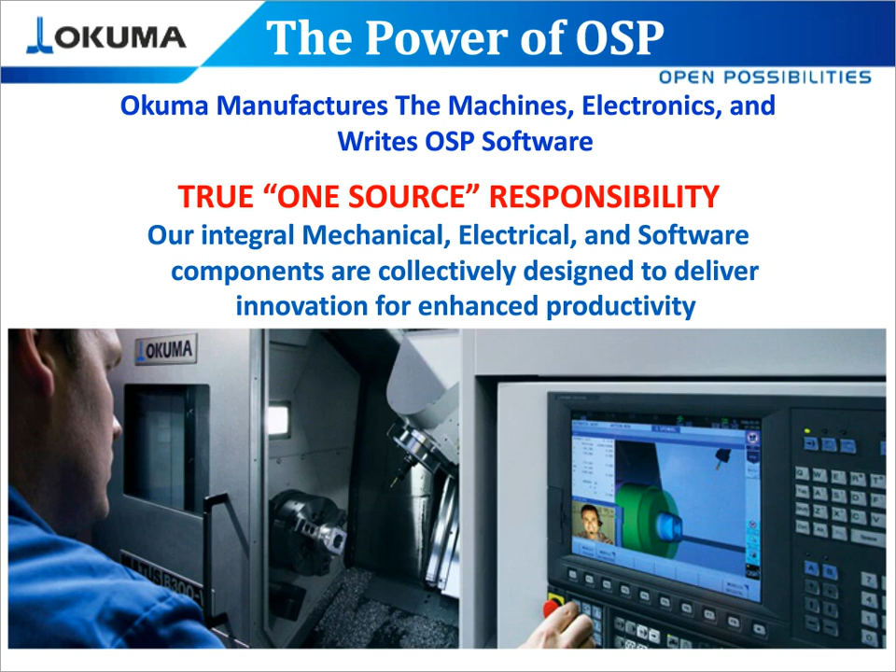We're not relying on any other builders or manufacturers to solve the problems that we see on a day-to-day basis. We're able to provide self-tuning drives, so we've got functions like our Servo Navi for tuning all of these different servos and drives that we have. We can provide that longevity of support like I talked about. We've shipped over 195,000 controls throughout the years, and like I said, we still provide support to earlier models.

The freedom to innovate. Because we are this one source, we're able to provide these unique services and platforms that are better catered to our customers. We've got less limitations for our software capabilities and improvement. So if I wanted to just go back and add another 1,000 parameters, I'd just go back to our software team that we keep in a cold, dark room back in the corner of the office. I'd tell them, hey, I want another 1,000 parameters. And they could give that to me in a matter of, probably half the time that it would take if I would have to use someone else's control.

If I bought someone else's control, I would be limited by that. So I have all these resources here that I can use. We're able to respond much more quickly to the needs of our customers, and we're able to grow and develop without these certain limitations that other controls would have.

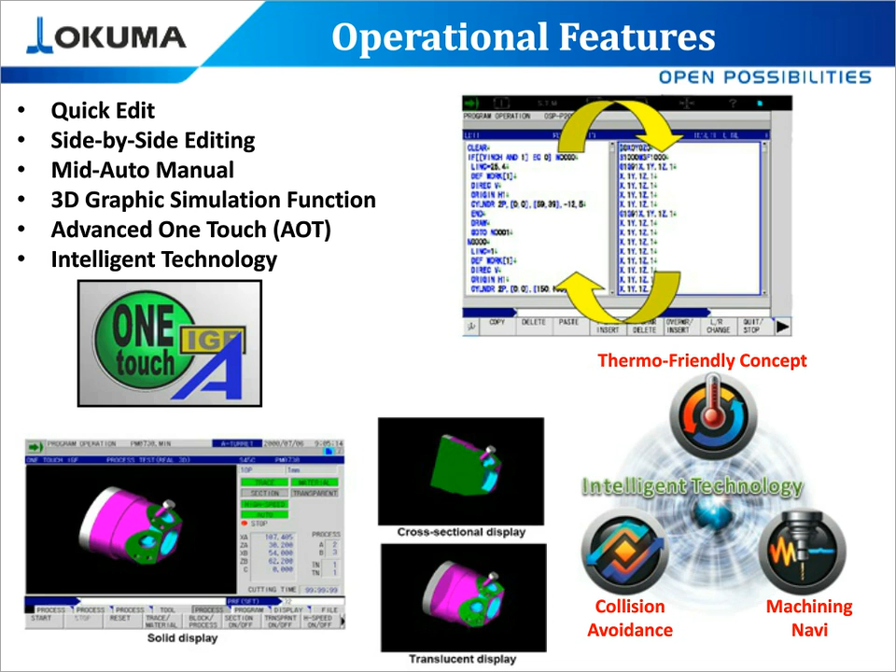So I did talk about that mid-auto manual function. I've got a short video here to describe what this actually is.

So I set this up on one of our lathes here. This is a P300L control, and I'll demonstrate the sequence restart in the mid-auto manual mode for this specific video. So you see we're just rough turning this part that you see on the screen there.

I'm going to manually interrupt the cycle, so I'm going to go into a feed hold state. Stop the tool. I select this mid-auto manual button, and what that allows me to do is jog away from the cut in any direction I want while I'm still in cycle. Okay, so stop the spindle.

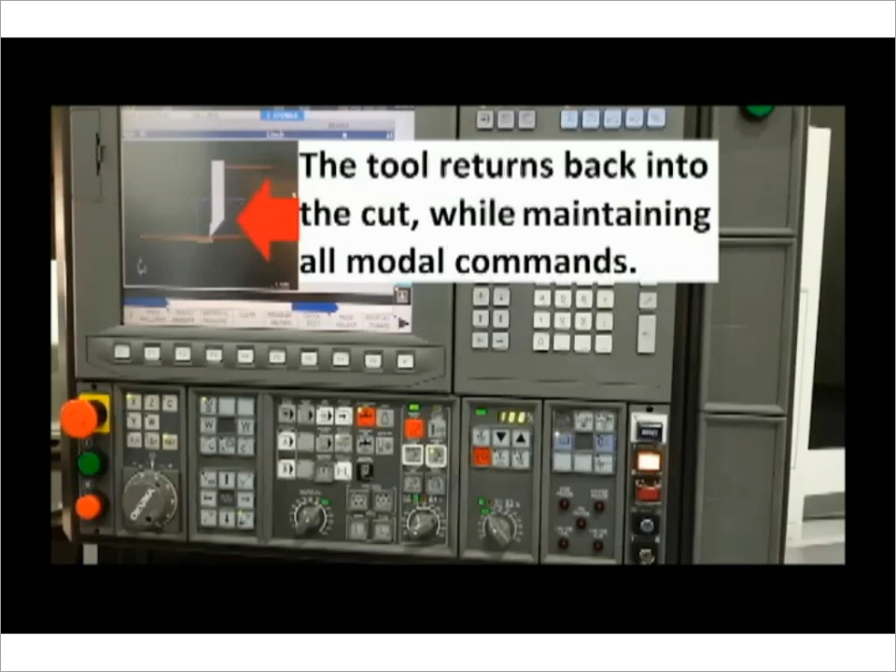I select the sequence restart button, and when I do that, after I've performed whatever task I needed to, that tool returns back into the cut, but it maintains all those modal commands. So after I've done that, literally the only thing I have to do is press cycle start, and it goes right back into my process.

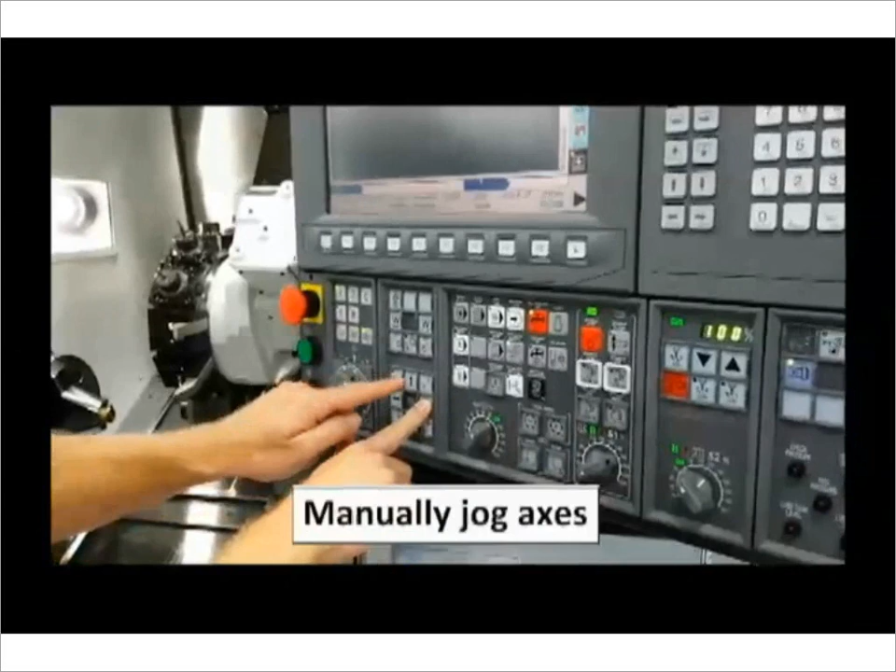So if I have to check an insert, maybe I'm drilling into a hole and I just need to check if my insert's all right, I would go into that mid-auto manual mode, jog back out of that hole, check my insert, make sure it's good, and I can return right back into that cut or drilling that hole. So this is just showing you with the machine there as well, manually jogging the axes.

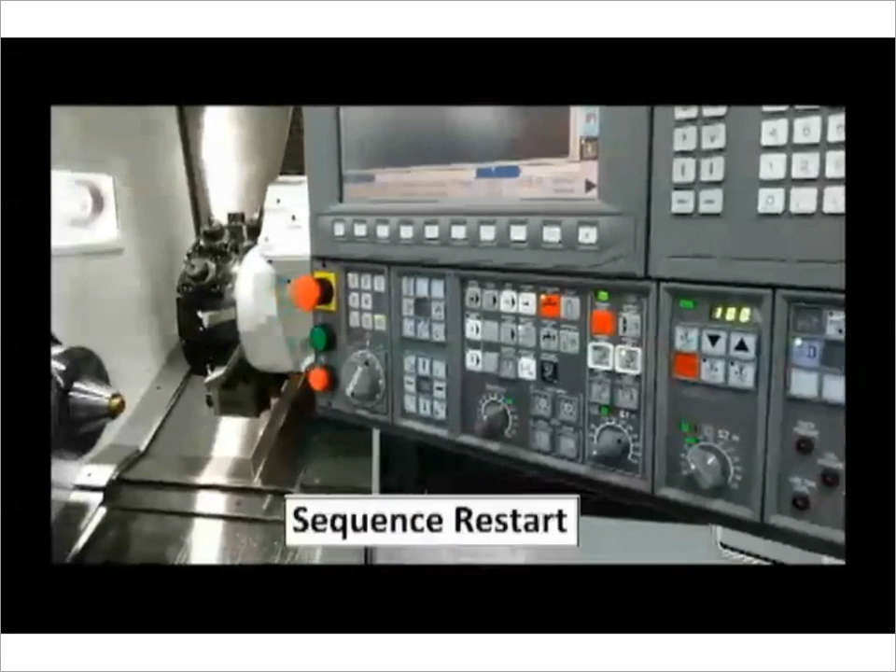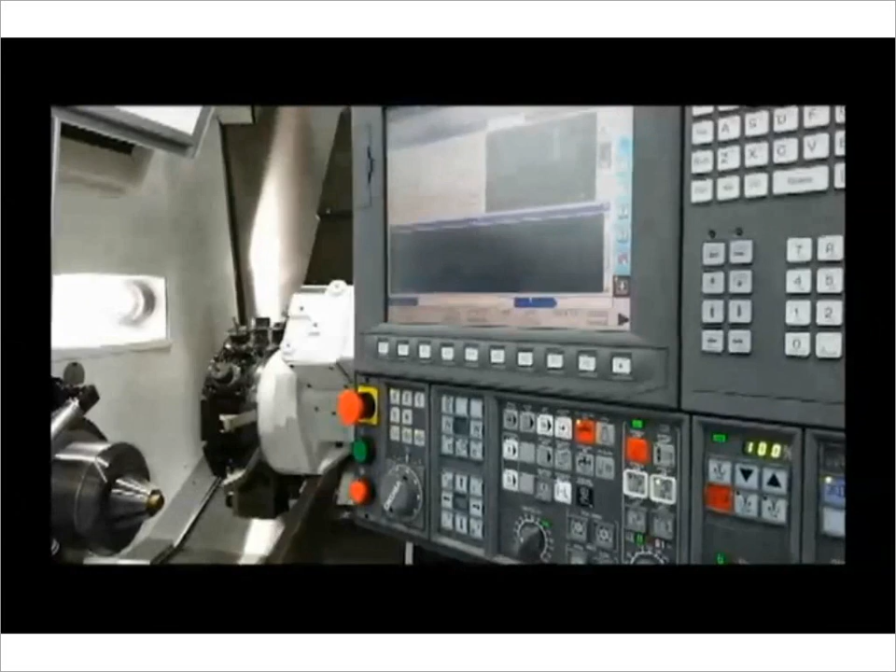And that's a standard feature of all of our controls, is that sequence restart and the mid-auto manual mode. They work in canned cycles as well. So this I'm showing you on a lathe, but if I had done this on a mill and I had drilled 50 holes, or I had to drill 50 holes, and I was on hole 49, and I wanted to check my insert or my tip.

So I go mid-auto manual mode, jog that thing out, and check it. Okay, it's good. But to return back into that cycle, I wouldn't want to wait 5 minutes to drill those 49 holes over again and air cut them. So with this function, I can go back into that 49th hole - or what if they were tapped? I wouldn't be able to do that. So I can go back into that 49th hole and continue right along with my cycle.

The next thing I'm going to talk to you about today is OSP Suite, and this is the newest generation of intelligent CNC technology that Okuma has provided. Basically what you're doing here is providing flexibility through our customization. I'm going to show you our maintenance and manuals functions. I'm going to show you all of these productivity enhancement tools that we've created in this software package.

I've got widgets for viewing vital machining information, but those are just a few of the things that make this OSP Suite software package really unique to our control.

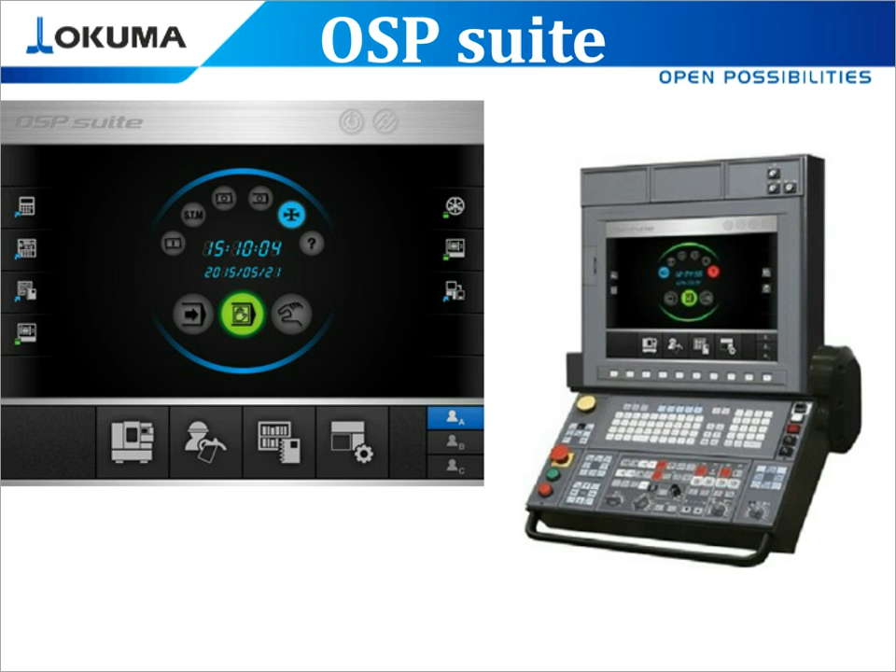So this is the OSP Suite home screen. This is what you're going to see if you have OSP Suite on your machine, and this is coming on our newer model machines. So when you walk up to the control, this is what you're going to see. This is the home screen, and if you direct your eyes towards the middle of the screen, that's going to be your machining status information.

So if you see the green lamp in the middle, that's letting me know I'm in MDI mode. You'll see if you're in auto, MDI, or manual mode, you see a clock and a date in the middle, and then you see your NC status lamps directly above that. So I've got my feed hold, alarm state, what have you, letting me know the status of my machine. So that's really what that middle section is for.

If you look off to the left and the right-hand sides there, you see those icons. There's 4 on the left and 3 on the right. Those are shortcuts that can take you to anything from manuals, calculators, any kind of remote desktop functions that we have. And I can put those on any page, any viewable page that I'll show you here in a second. But those are just quick little shortcuts that you can access just by touching the screen there.

At the bottom of the screen, you'll see that icon on the far left that looks like a machine. So that's going to take you to your run screens. I've got a maintenance function, which I'll show you here in a little bit. I've got manuals included with my OSP Suite package. And then I've got the ability to customize and personalize all of these different pages right here at the control.

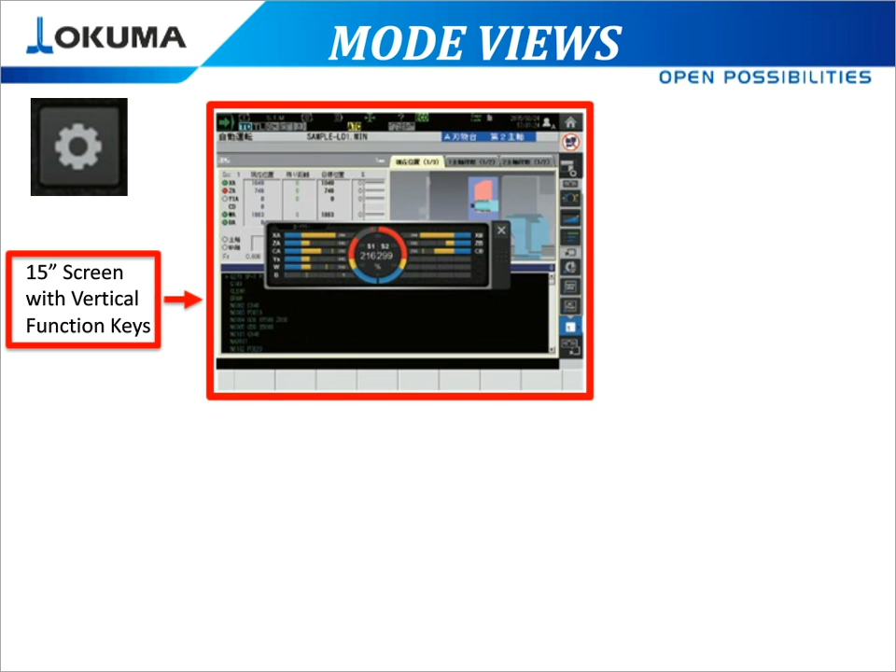With OSP Suite, we've got a couple different monitor sizes that we use for our machines. You've got a 15-inch screen and a 19-inch screen. The biggest difference you're going to see here in that red box is the 15-inch, and then my 19-inch screen modes are at the bottom there.

The biggest difference you're going to see here is the widgets. The widgets you'll see in the red box is that box in the middle right there, it's like a load monitor. With the 15-inch screen, since I don't have enough space to display all these, I have to put my widgets in the middle of the screen. These widgets again are just displaying vital machine information. I'll talk to you about what those widgets do here in a little bit.

I just wanted to show you that there's basically different modes that you can put our 19-inch screen in. Since we do have that extra landscape, we're able to really fill up the screen however you want. So I've got a full screen mode, A mode, B mode, just for the different widgets that are located on the screen. So I've got the ability to customize that if I like.

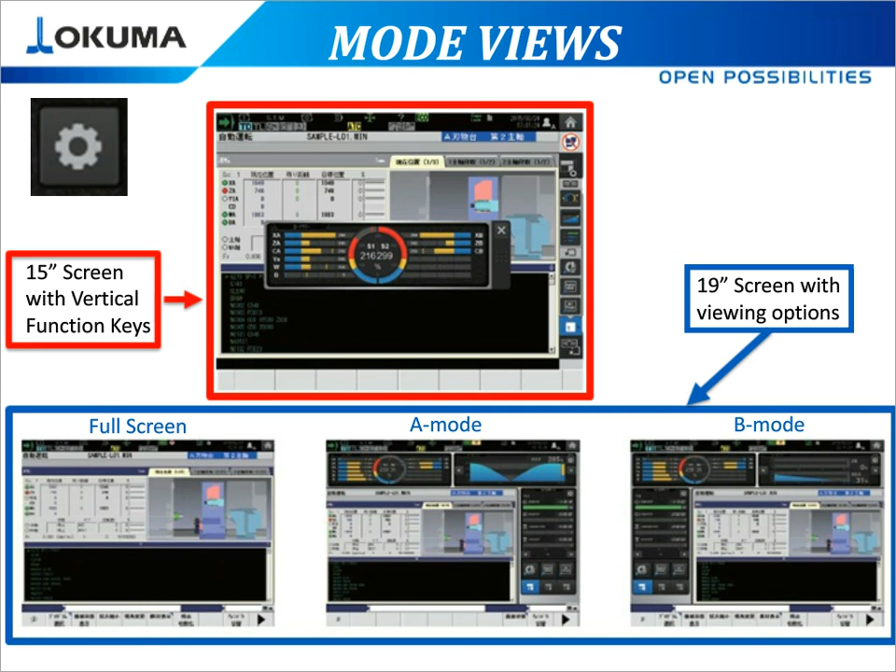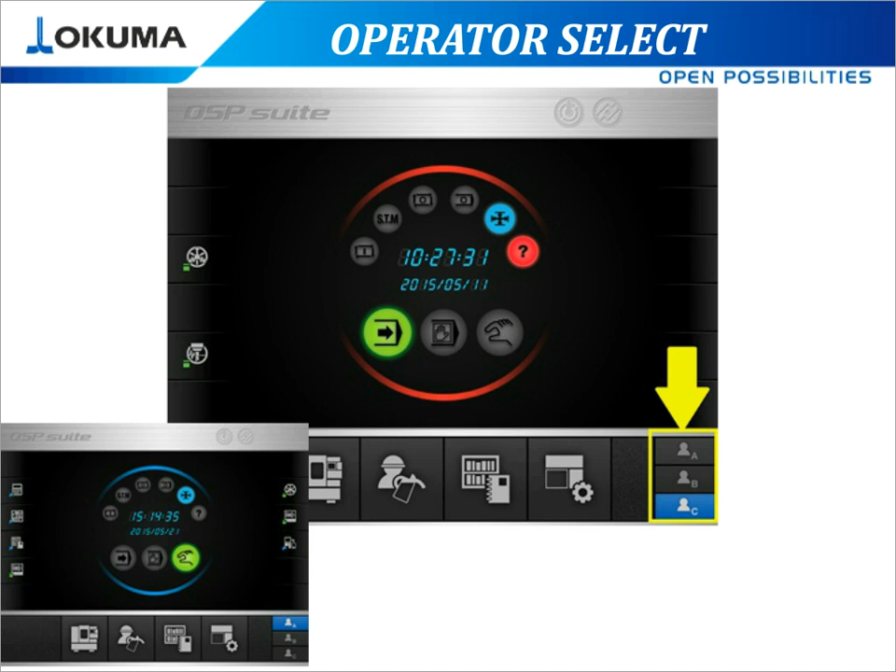Operator select: off to the bottom right, I've got the ability to select my different operators or users just by touching A, B, or C. All of these different operators can select all of their different run screens, their parameter pages, their tool data page. They can put all these different widgets and shortcuts and different things on all of these pages how they want to view it. So all of you guys are going to be different, you're going to want to see different things on all of these different pages that I'll show you. So we've given you the ability to customize and personalize all of these different pages, and it's very easy to change.

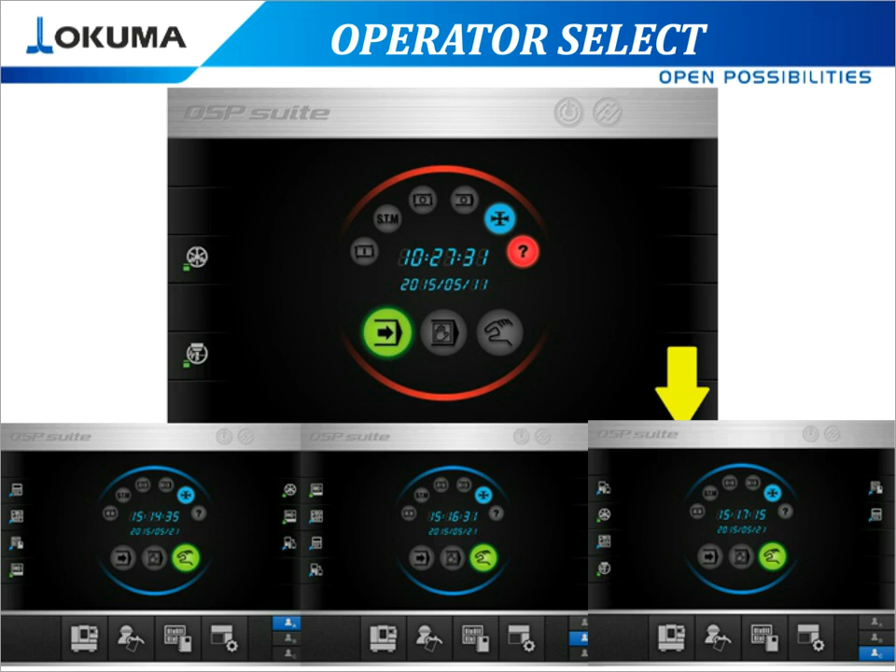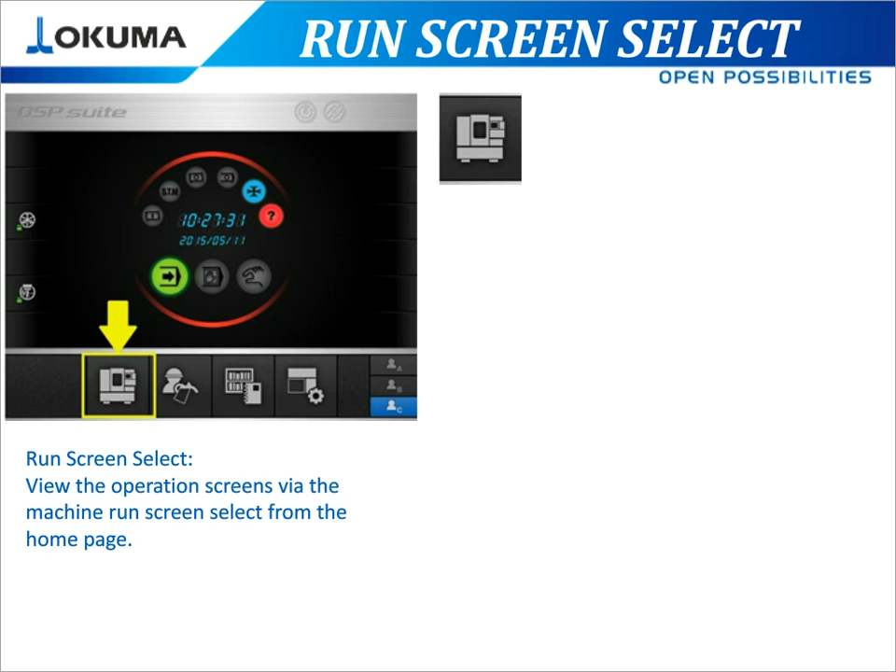So that machine icon takes you to the run screen. From the home screen, if you would hit that machine icon, that's just going to take you to your run screen or to your parameter pages, what have you.

With this setup, you see I've got two horizontal widgets at the top of my run screen and then a vertical one off to the side. And I said that you could customize and change all this and put whatever widgets you like on all of these different pages, but this is just the run screen that I'm showing you right here.

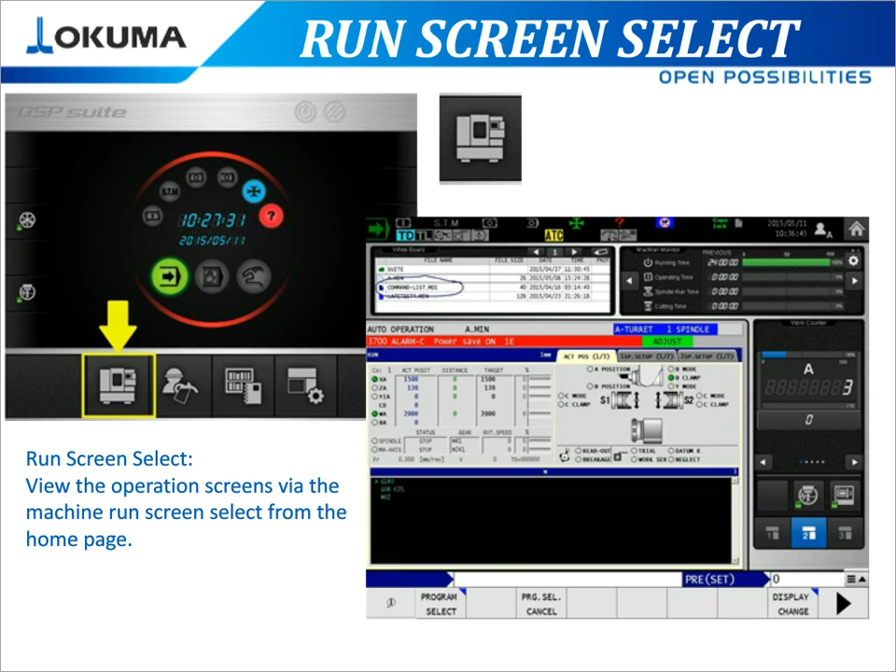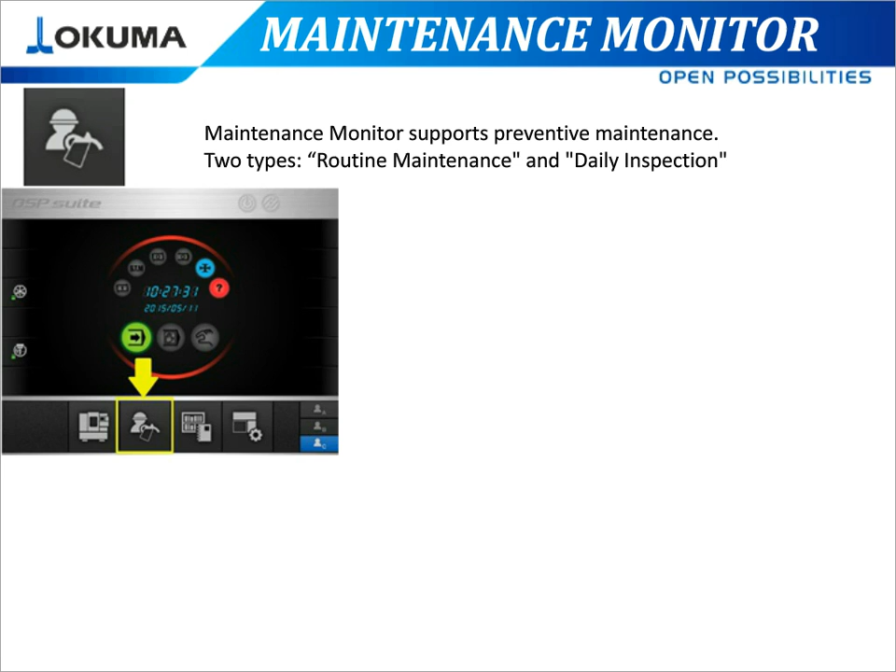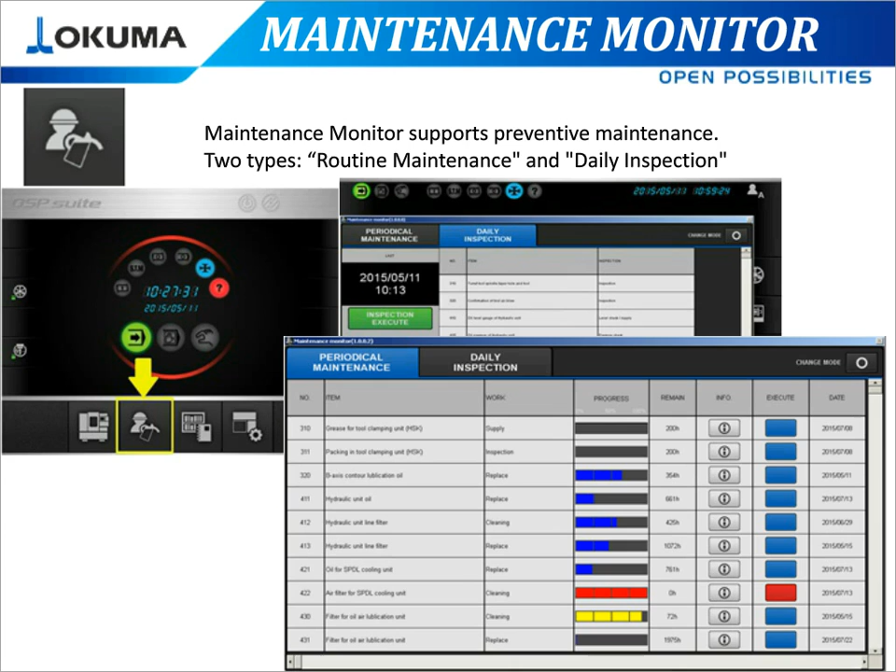And again, if you see in the top right corner, there's a change mode button with a little circle. That's going to let me edit or add new maintenance tasks to this list, and I can organize and view those how I deem necessary. So that's the maintenance monitor.

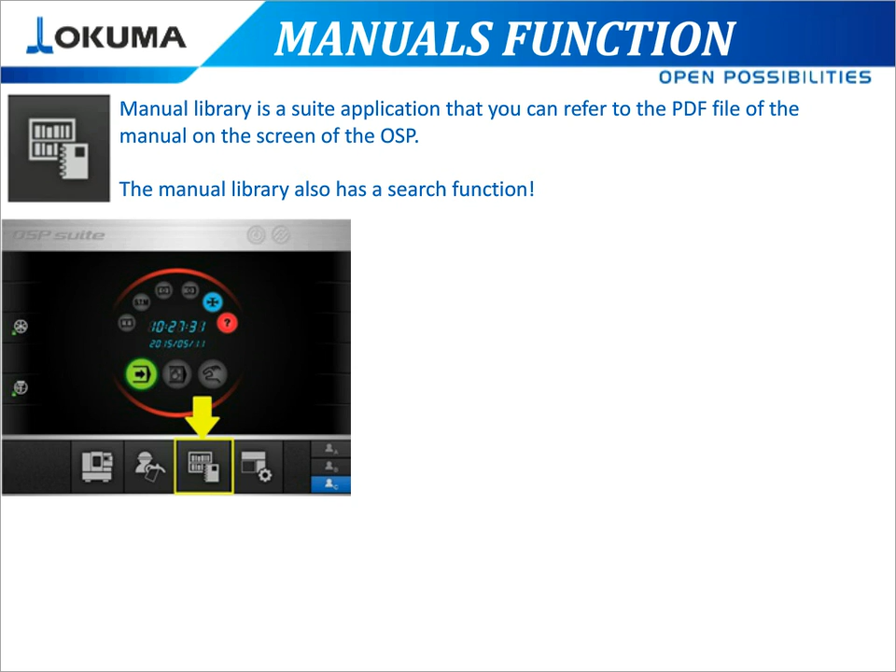I said there are manuals included with OSP Suite, and these manuals again are going to change based on the machine type and model that you have. But I have a list of manuals included that I can go in and pull up right here at the control. I said I didn't need to have a big heavy book out here at the control, or try to look things up online. I've got everything built into the control right here.

I've also got a search function included in this, because if I just had these manuals and had to go through the pages anyway, that's not saving me any time. Without this search function, I wouldn't really need this anyway. So that keyword search is great for these included manuals. And I can also add my own manuals and search for those as well. I've got a PDF viewer built into my control here as well. But that's the manuals function.

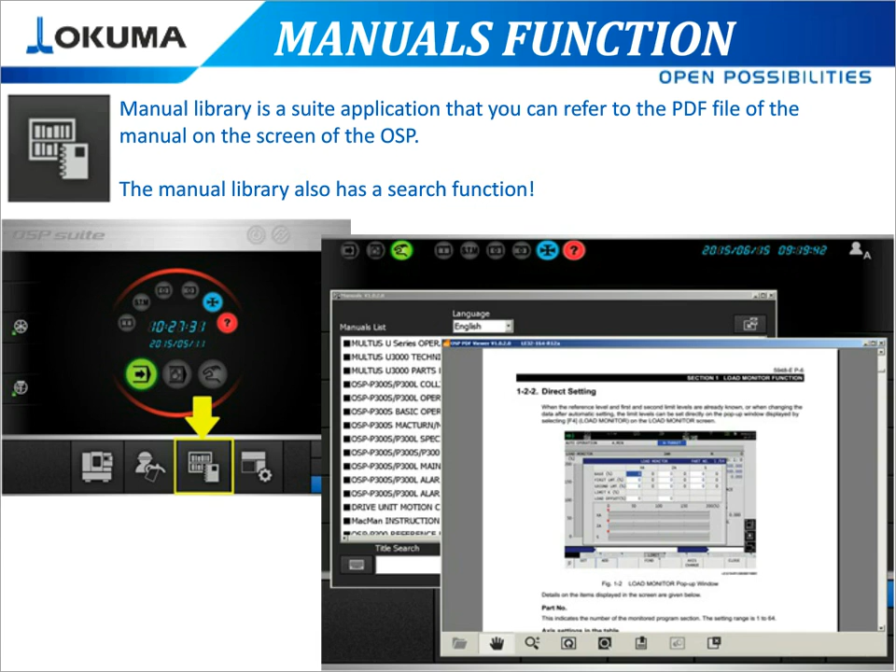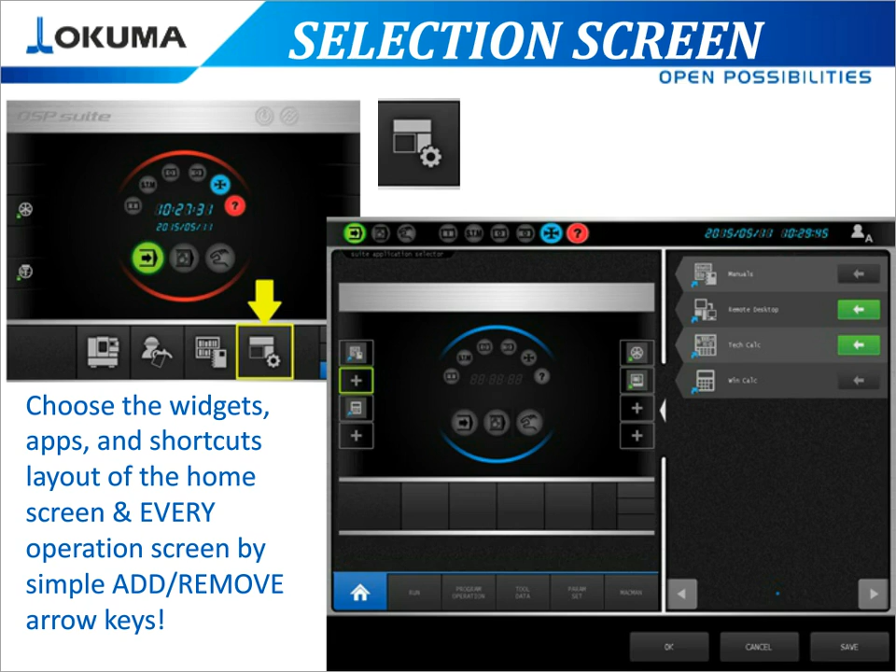These shortcuts that I talked about, I've got a few key ones: a Windows calculator built in, a technical calculator, servo navi, machining navi, and 5-axis auto tuning. And again, I can throw these on any of these different pages and view them however I want to.

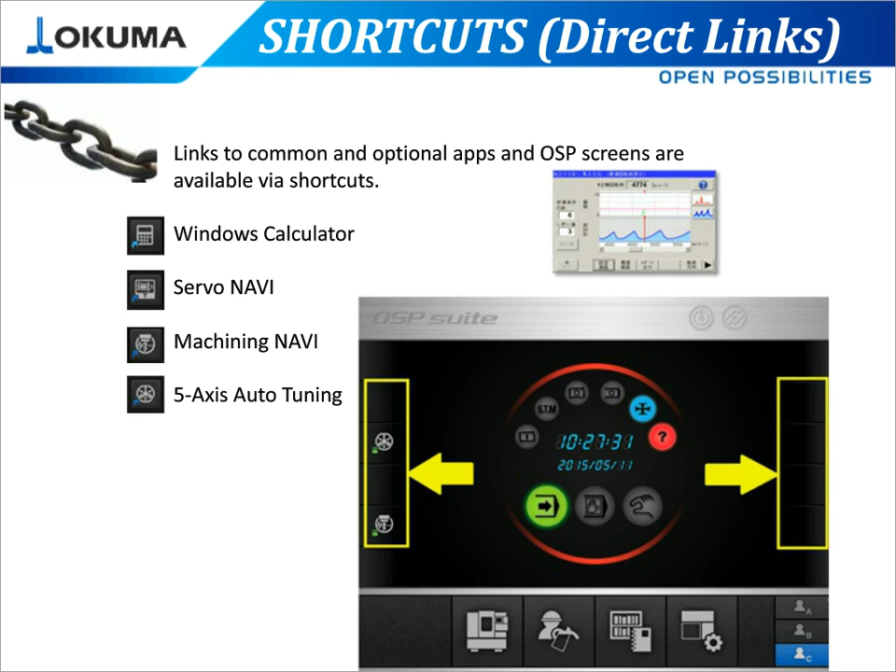Here's my technical calculator. I can calculate turning and cutting speeds, surface finish roughness, milling and end milling, common unit conversion, feed rates, drilling speeds - anything with this handy dandy calculator that I can throw on all of these different pages.

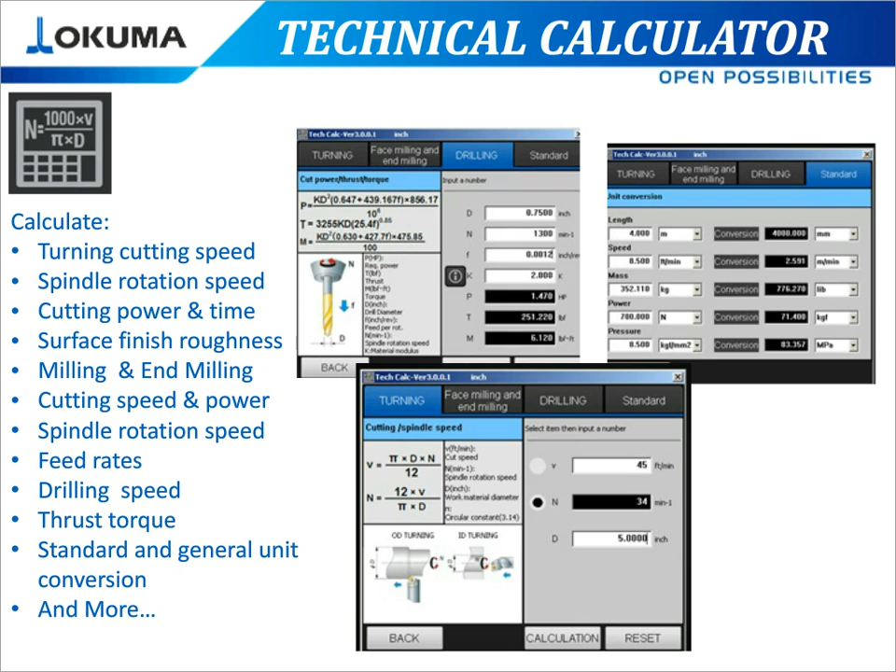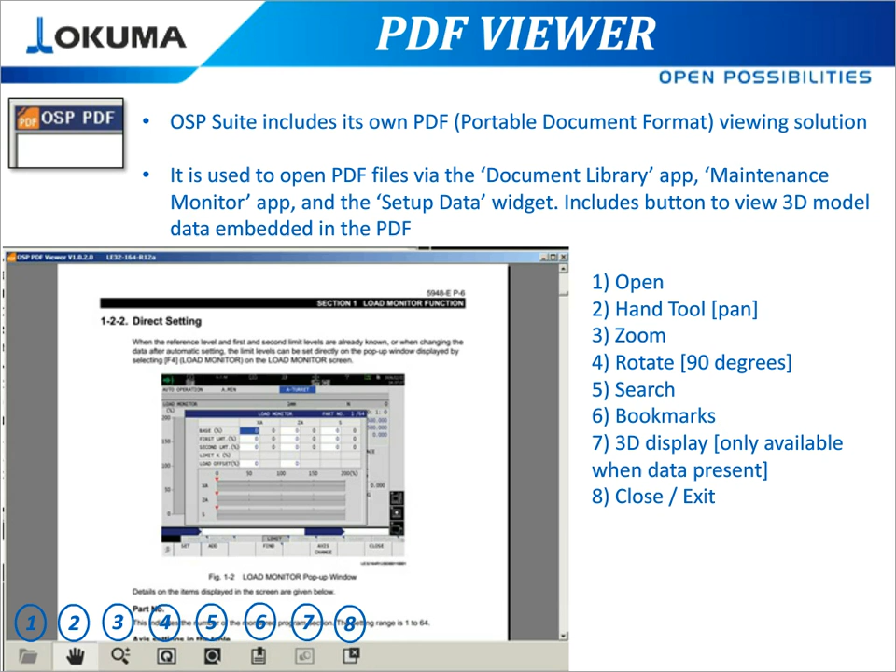A 3D model viewer, so I can view STL files right here from the control as well. I can zoom in, I can box zoom in on certain areas, I can view a translucent display of all these different files as I want.

It is a touch screen monitor, so I can drag and rotate this thing however I want to. So basically I'd throw all of these files into my control via USB or network, however you want to do that, and then I can have my setup guys view all of this from one of the widgets that I'll show you here in a little bit. So you could view this file, this STL file, right there from the control.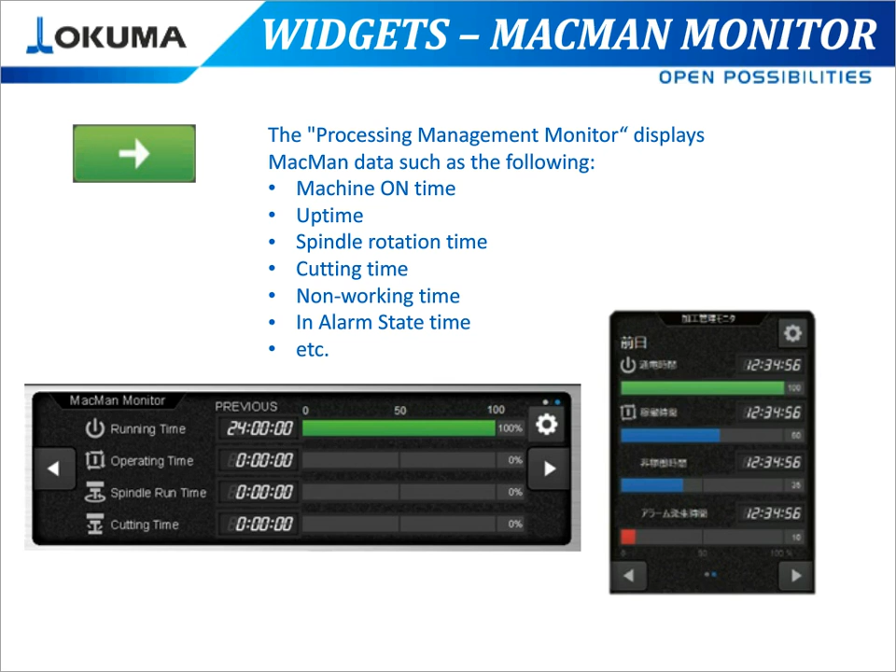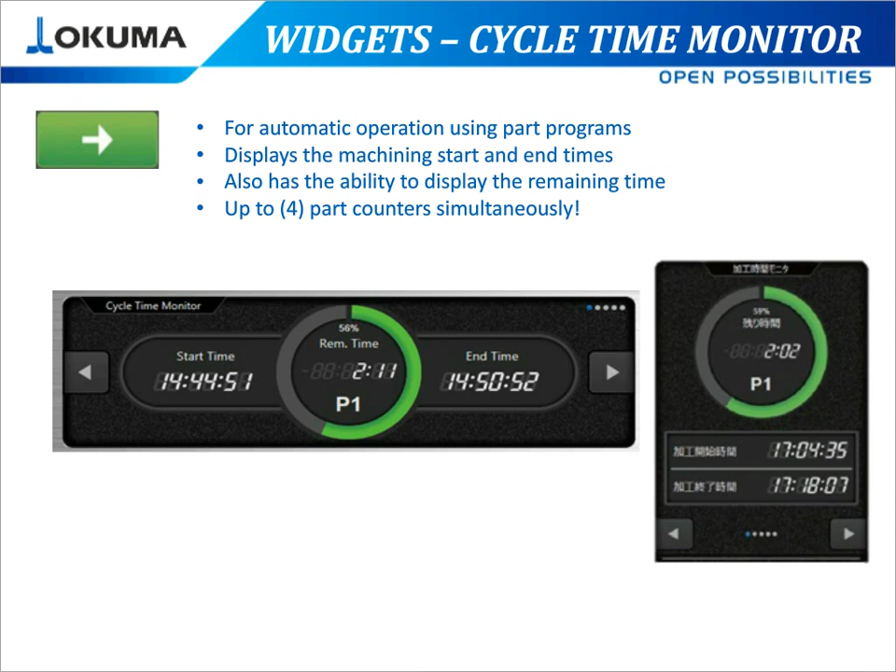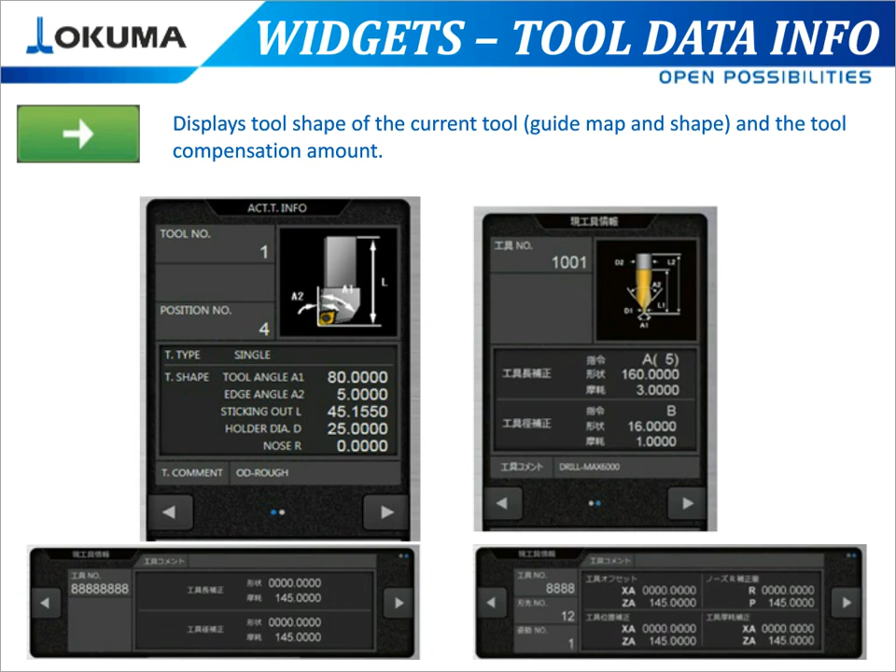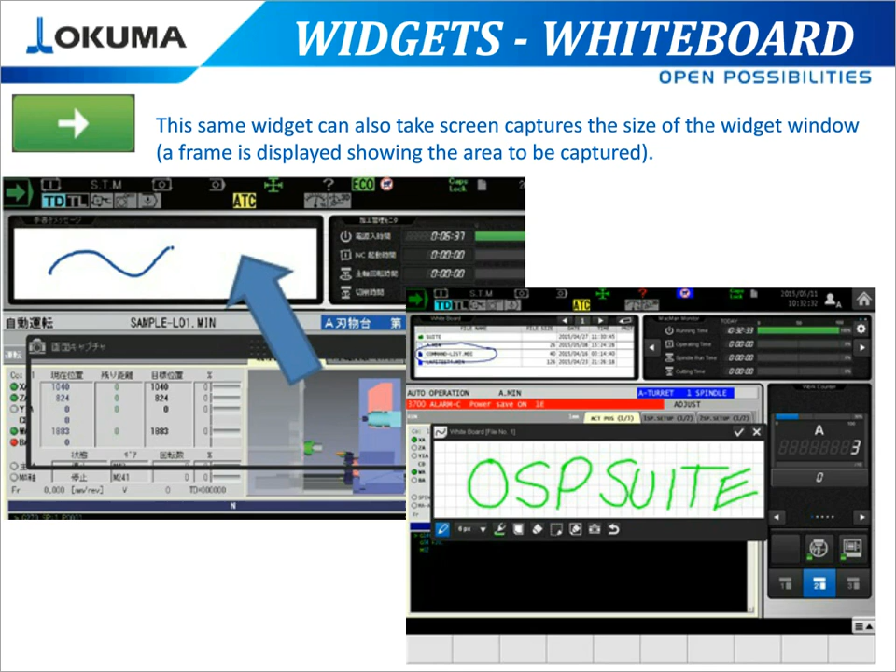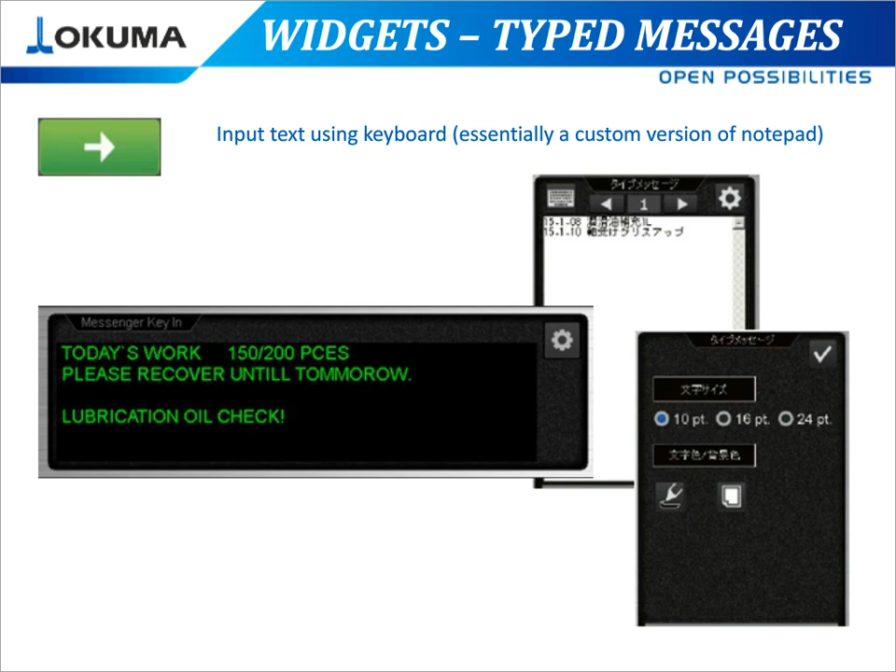I can also type messages as well. So if I didn't want to write the message by hand, I can use that keyboard to type a message, maybe to the next operator, letting him know what's going on with the machine. All of these messages, these notes, are stored in the MD1 directory. We have a Windows-based platform, just like your PC, so you can access these from the MD1 folder and export them as well.

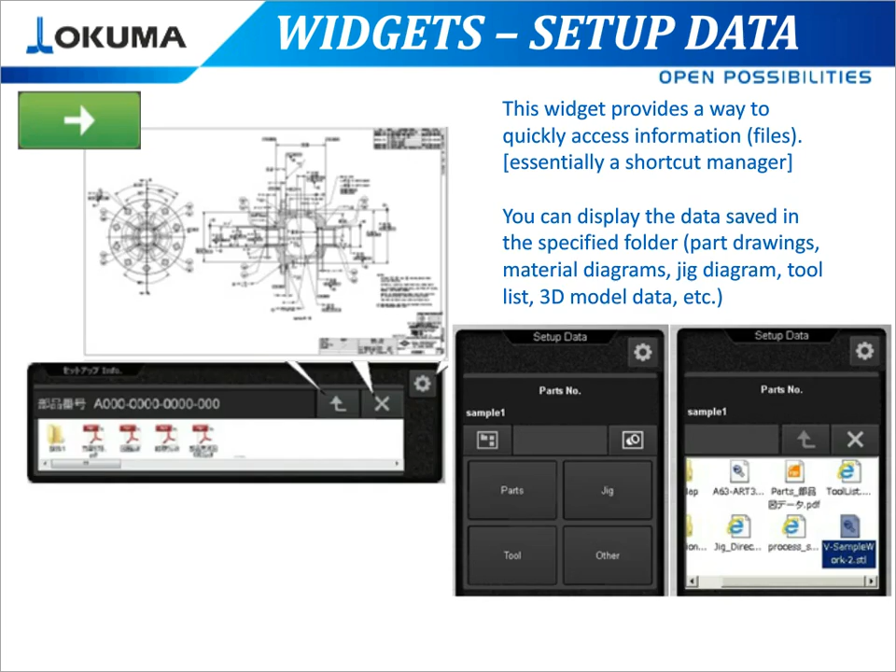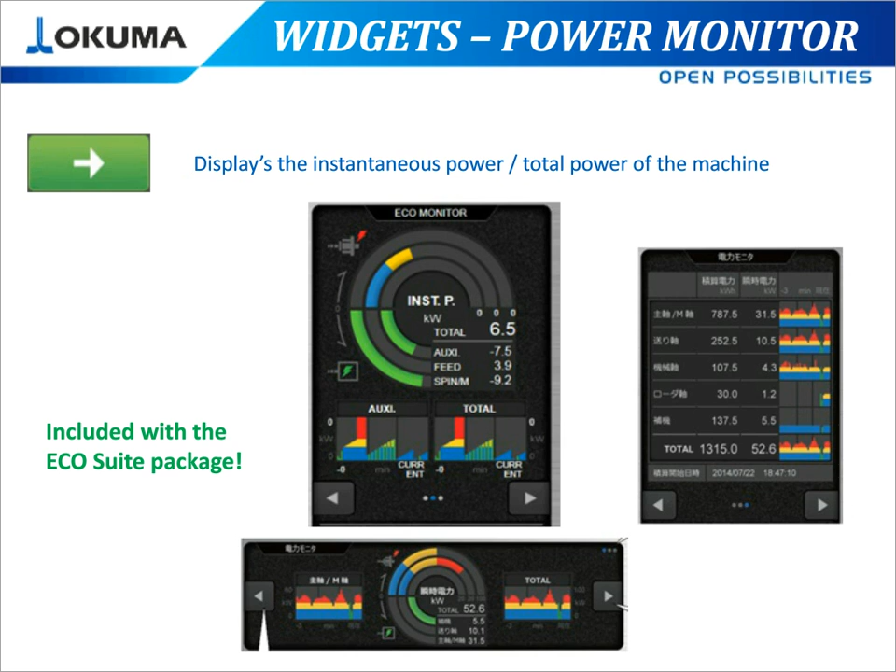That EcoSuite package is our energy saving technology. I just told you about that little widget for the instantaneous load - well, this EcoSuite package allows you to monitor that. I have the ability to turn on and off all of these non-essential pumps, conveyors, lights, and different equipment that I don't need when I'm not machining. After the machining has completed, I can set this up to automatically shut off all of this extra equipment connected to my machine or inside the machine, and it just shuts all that off automatically. After that happens, you'd see that load monitor decrease, and you can actually see the savings you get from this EcoSuite package.

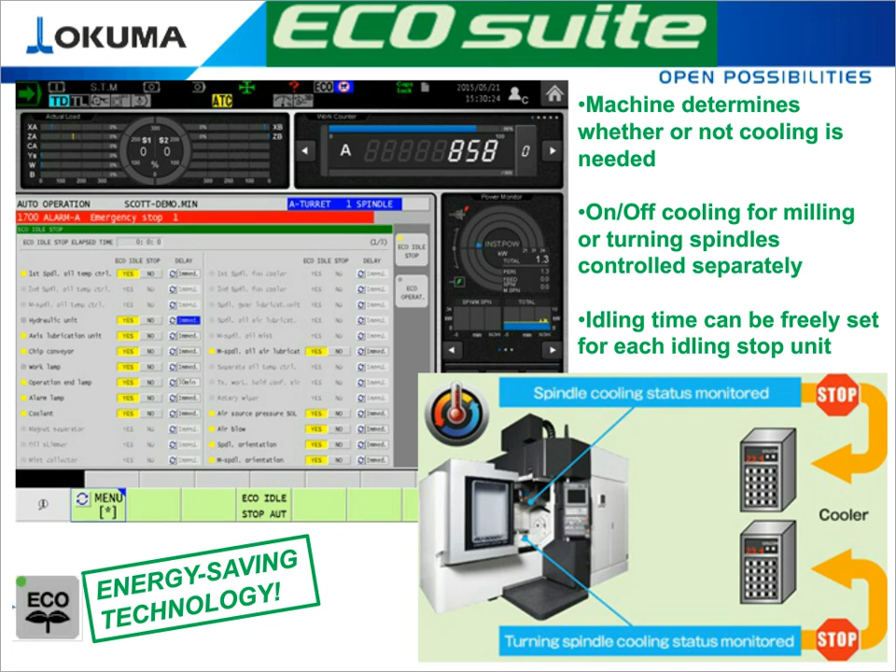To go along with our OSP Suite, if you haven't gone to our App Store or know about apps in general - behind our open architecture, it allows us to do things like create apps. Just like you have apps for your smartphone, you can have apps for your machine tool, for our OSP control. So when you get a second, go to myokuma.com. We've got about 30 plus - I don't even know now, it's always changing.

So many different apps that you can download from your computer and take it from USB right to the control, and you can have an app on your machine in less than 5 minutes. Or if you're connected to the internet already, you can just download it at the machine. But all of these different applications can provide really quick, productive ways for you to increase productivity in general in your machine tool.

So if you have any questions on apps or the App Store in general, please let us know and check out the website. But there's a lot of really useful apps. Like I could download an app called Machine Alert, so anytime my machine is in an alarm state, I would get a notification via text message or email letting me know about the alarm on the machine. That's just one example of some of the apps that we have on our App Store. I'm not going to go through all of them, but there's quite a few useful apps that we have customers downloading every single day. But that's our App Store.

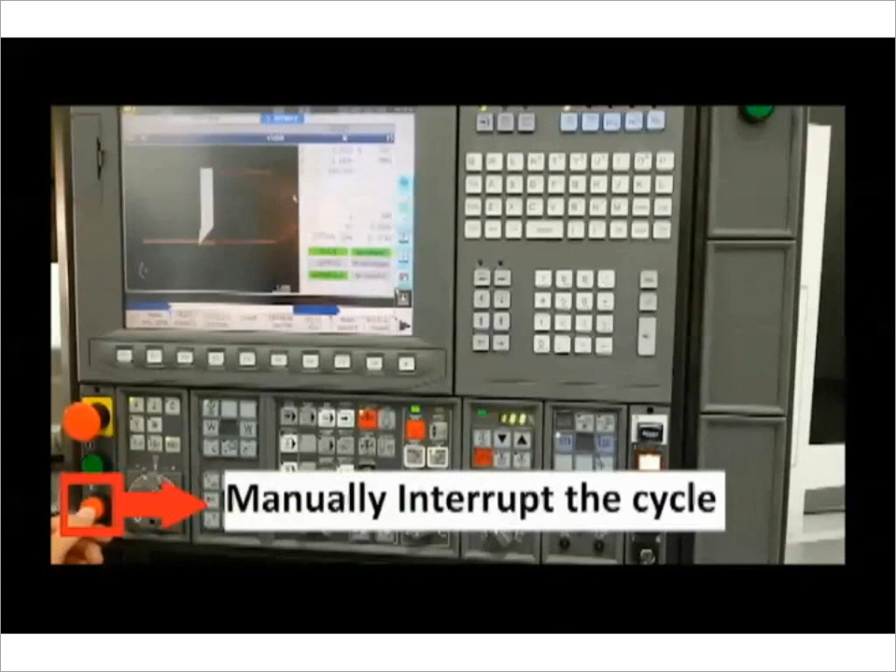So this specific video, I'm demonstrating the sequence restart function and also the mid-auto manual mode. These are standard features, standard buttons you'll see on our controls. Right now you see I'm just doing a rough turning process. Once I'm turning, I'm going to manually interrupt the cycle - maybe I need to check my insert or something. So I go into feed hold, and then I select this mid-auto manual button.

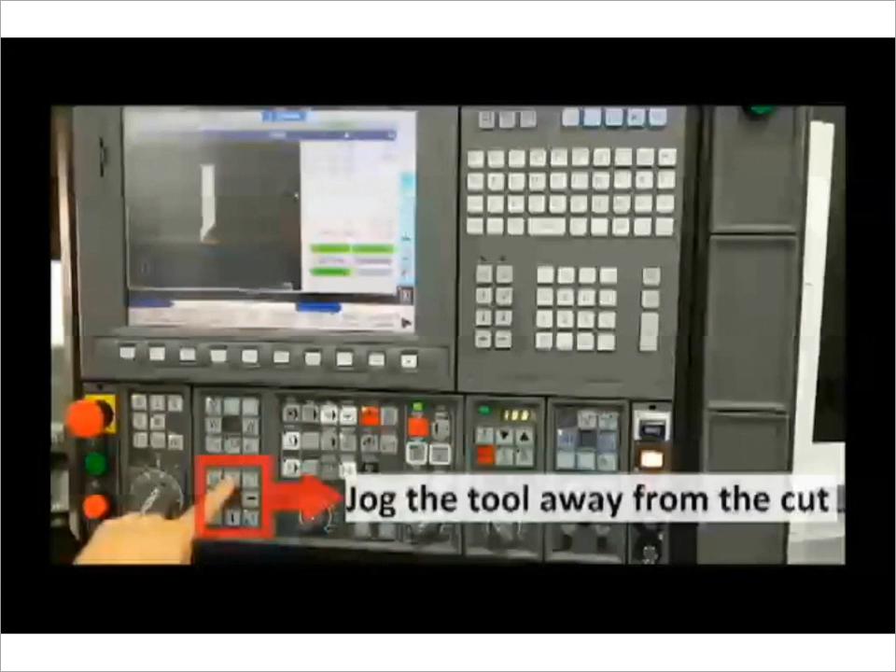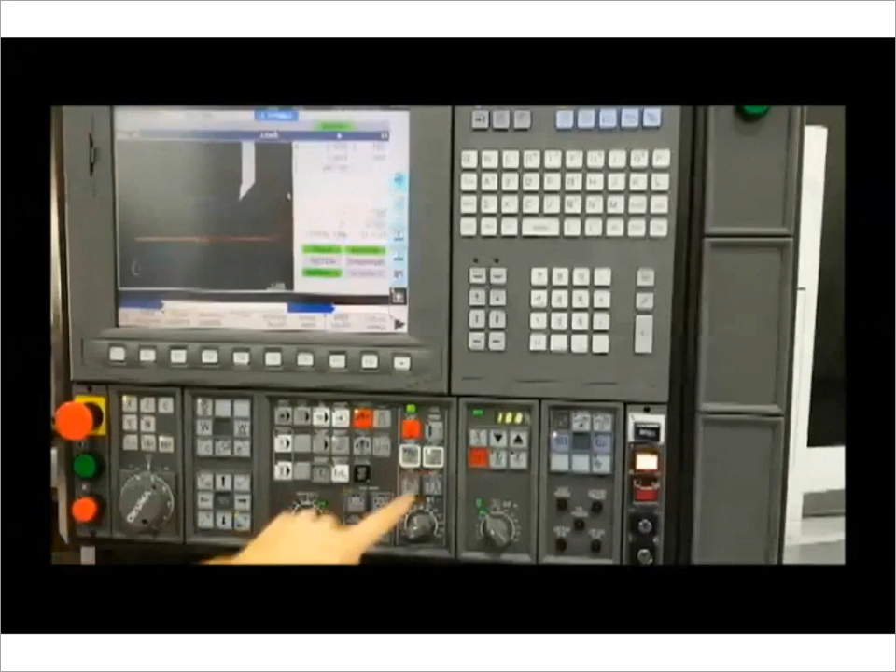Restarted. All right, okay, well... it's okay, this is a 300L control. It's not gonna play for me, is it? No, it looks like for whatever reason we're having trouble with the music on the video. So, okay, well I'll just - if you want me to, I can describe it.

Quickly, without the video: basically what mid-auto manual mode is going to do is allow you to interrupt your cycle and then return back into that cycle while maintaining your modal commands. So in the video I was going to show you physically retracting your axes, and then you hit sequence restart, which takes you right back into the cut, and after that I just have to hit cycle start. So it's very easy to check inserts or perform whatever work I want after I've retracted my tool to a safe position. I go right back into that cut - with two button pushes, I'm right back into my automatic process. That's what the sequence restart and mid-auto manual functions can do for you on the controls.

And they work with lap cycles as well. So if I was milling, if I was on a vertical mill and I had drilled 50 holes and I need to return back to the 49th hole, I don't want to run this complete cycle all over again and air drill all of these holes. Or what if they were tapped? I wouldn't be able to do that. If I want to go back into that 49th hole, I can use this sequence restart function to do that and select which hole I would like to return to. So those are just a couple of examples of how you can use that sequence restart feature and the mid-auto manual feature on our control, and those are standard.